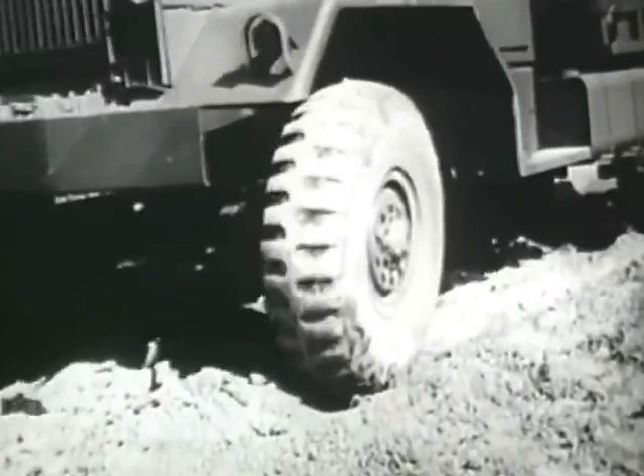Steering a heavy vehicle by manual effort only emphasized the need for a steering assist. This has been accomplished by adding a hydraulic system to the cam and lever steering mechanism. In this film, we will discuss the principles of operation of the hydraulic steering system.

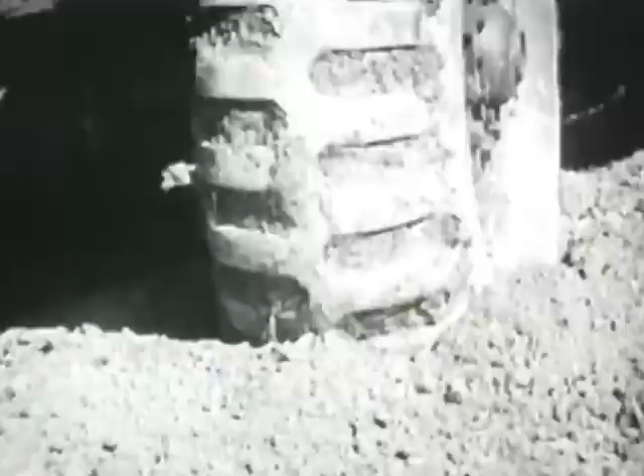This vehicle uses a cam and lever steering mechanism consisting of the following components: a steering shaft and cam, a Pitman arm lever, a Pitman arm shaft and Pitman arm, a drag link, and a tie rod.

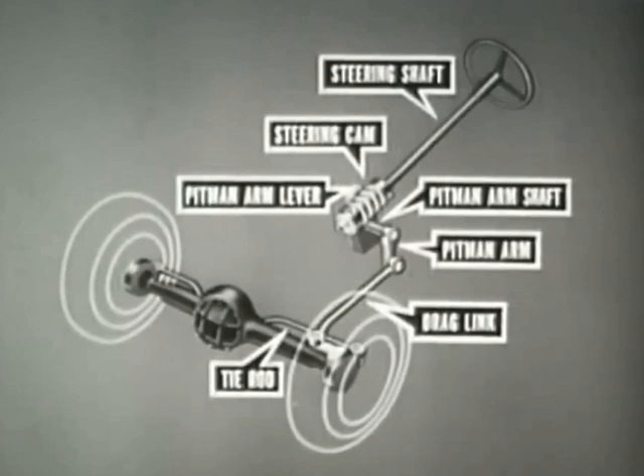To obtain the assist, a hydraulic system has been added to the cam and lever mechanism. The hydraulic steering system is made up of 5 major components: the reservoir, pump, relief valve, control valve, and power cylinder. These components operate on the principle of pressure differential.

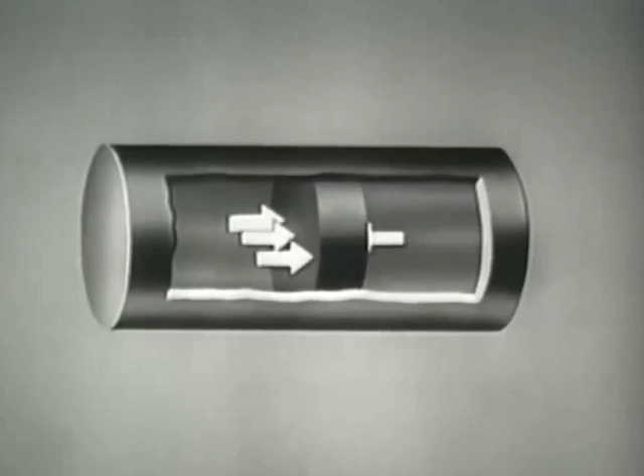Pressure differential is illustrated by this section of pipe. In the pipe is a movable block. The arrows on either side of the block represent equalized pressure. As pressure on one side of the block is increased, a pressure imbalance or differential is created in the pipe, moving the block in the direction of the lower pressure. The moment the pressure on the opposite side of the block is increased to equalize the pushing force, the motion of the block is stopped.

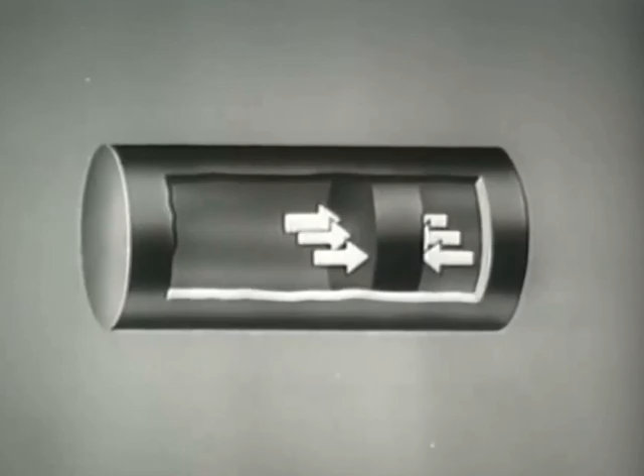In like manner, as the fluid pressure is increased on one side of the piston, it will be moved by pressure differential, aiding in steering the front wheels through the steering linkage.

To aid in illustrating the internal function of the hydraulic system, a schematic diagram will be used. The steering linkage from the Pitman arm lever to the front wheels will not be shown.

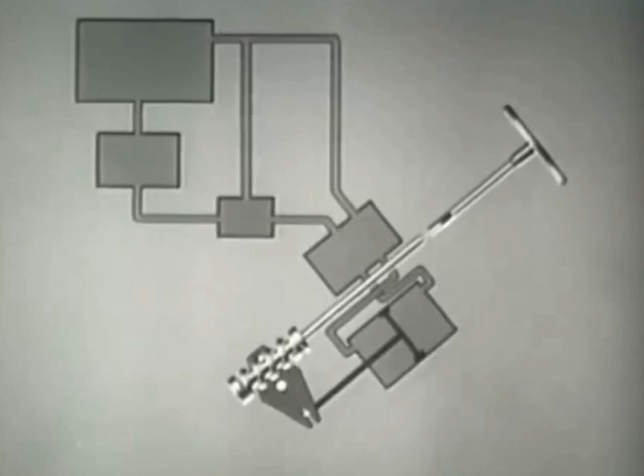Let us view the 5 major components of the hydraulic system as they operate progressively to deliver the steering assist. The reservoir supplies fluid. The pump, driven by the engine, delivers the fluid under pressure to the relief valve and control valve. The control valve, actuated by the steering shaft, directs the fluid to the power cylinder. The power cylinder converts hydraulic pressure into mechanical force by means of a piston.

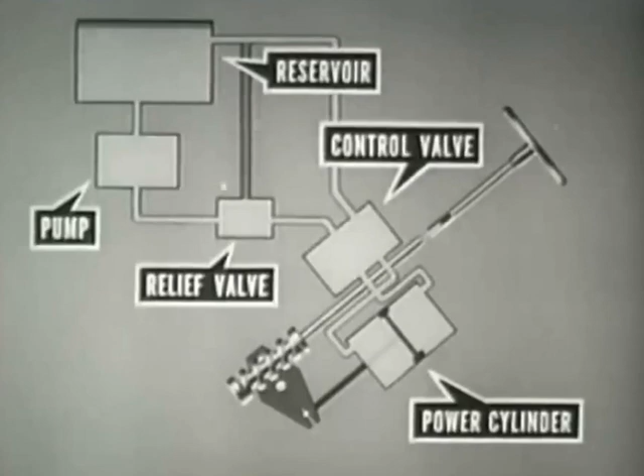The control valve is the heart of the hydraulic steering system. The control valve has a spool which directs and controls the flow of fluid to the power cylinder.

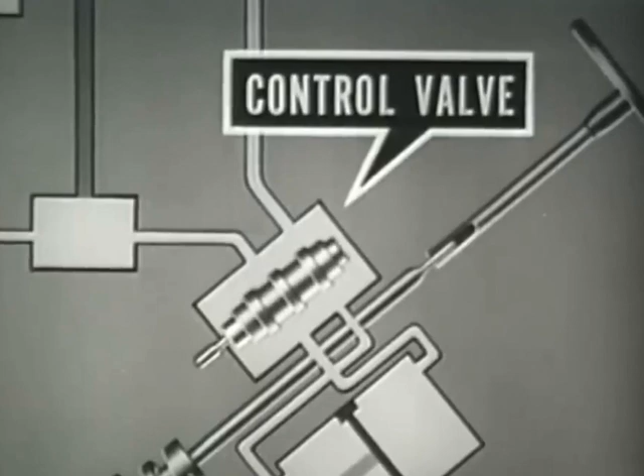With the fluid removed, let us look at the internal construction of the control valve. The spool has lands which control the flow of fluid through the passageways to the power cylinder.

The fluid enters the control valve through the inlet port and flows around the spool in channels leading to the power cylinder. After the cylinder has been filled, all fluid then flows to the reservoir.

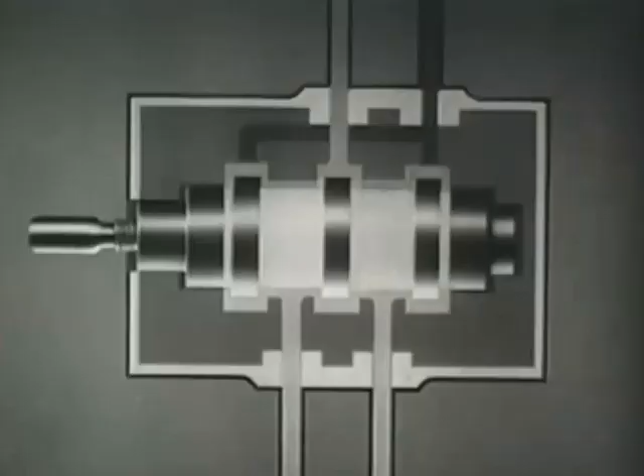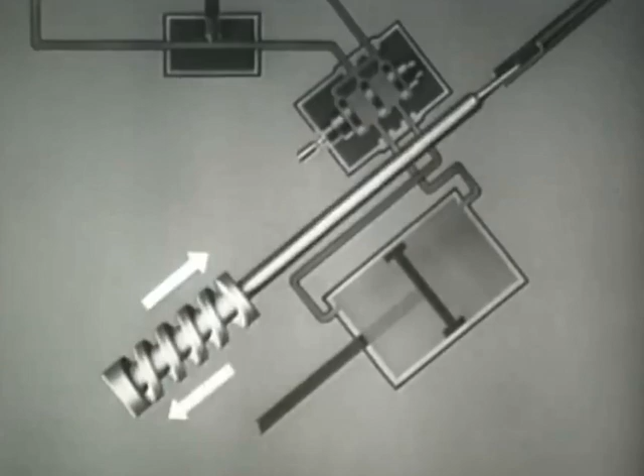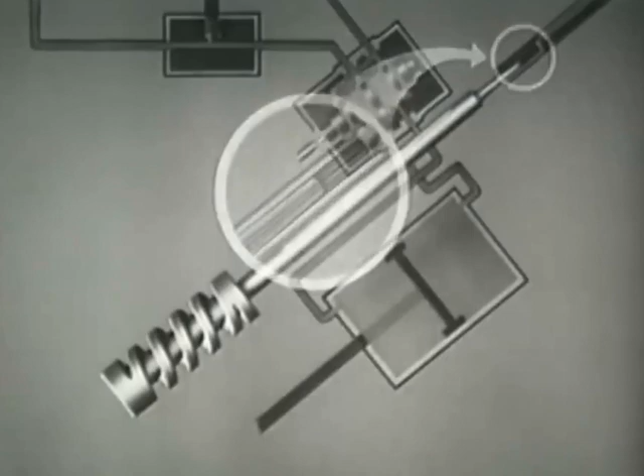In order for the hydraulic steering assist to operate, it is not only necessary for the cam to rotate, but it also must be able to move up and down. A spline connection makes this possible. Were it not for the splines, the steering wheel itself would move up and down.

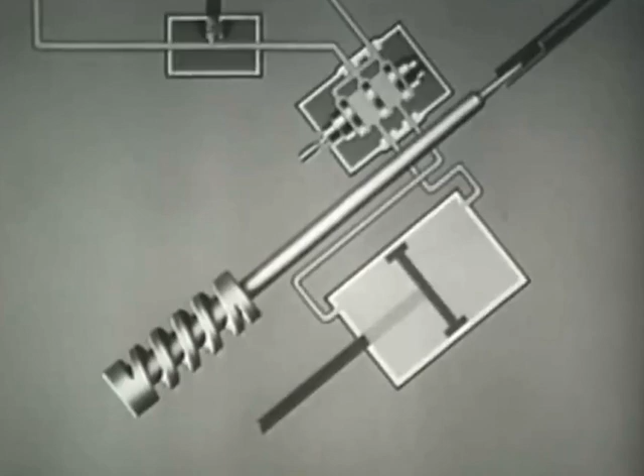The cam is held in center or neutral position by a spring at each end, supported by the steering gear housing. The Pitman arm lever, which actuates the Pitman arm, has one end fastened to the piston rod, the other in mesh with a groove in the steering cam.

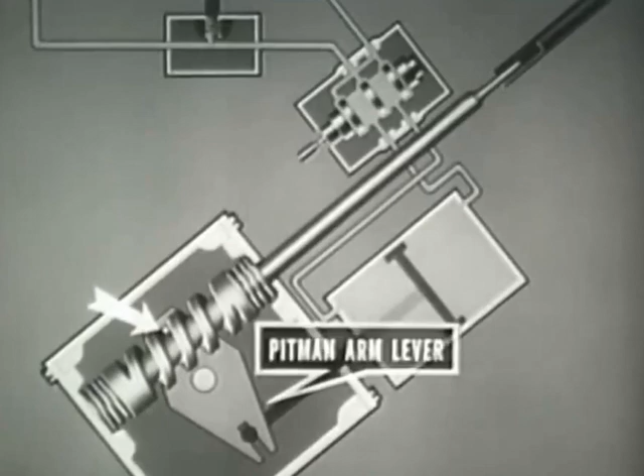When the steering shaft is turned, it requires a greater effort to turn the Pitman arm shaft and lever than to compress the springs at either end of the cam. This is so because the Pitman arm shaft and lever are connected to the front wheels. This action causes a cam spring to be compressed, allowing the cam to move up or down, depending on the direction that the steering wheel is turned.

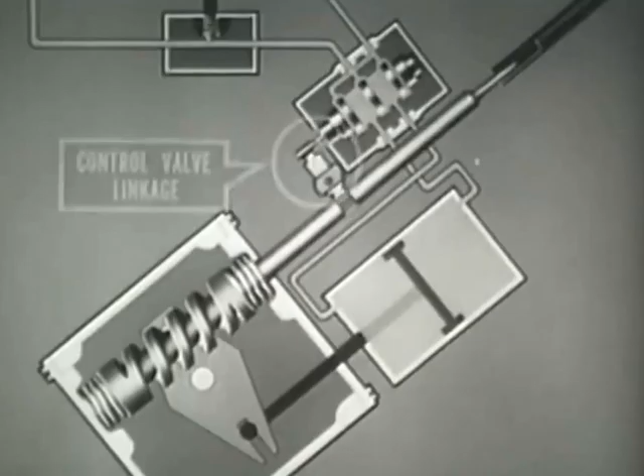This up and down movement of the steering cam actuates the control valve through the valve lever linkage. Full pressure of the hydraulic system is applied with only a few thousandths of an inch of control valve travel. In neutral position, all fluid flowing into the valve from the pump is returned to the reservoir through channels in the upper part of the valve housing, and no steering assist is being delivered.

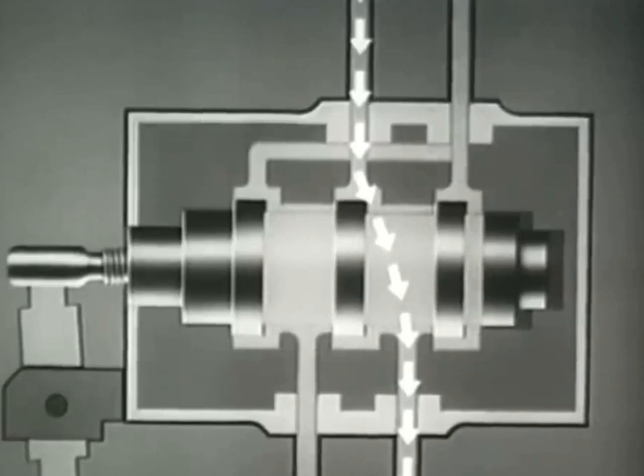As the steering wheel is turned, the up or down movement of the cam actuates the control valve lever, shifting the position of the valve spool. The spool lands corresponding to ports on the valve housing direct the flow of fluid from the pump to the power cylinder.

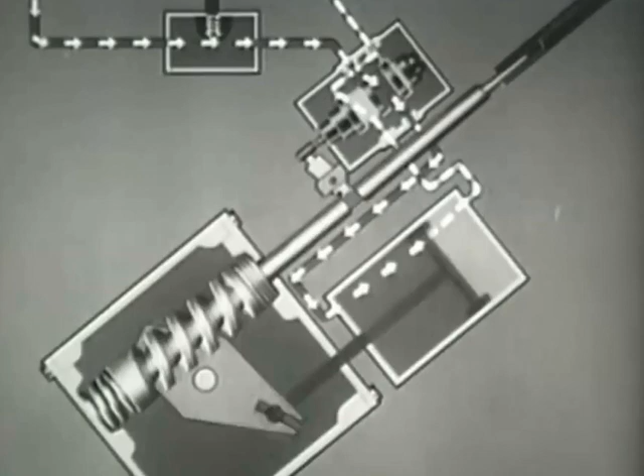This flow of fluid causes an immediate pressure increase on one side of the piston in the power cylinder. At the same time, fluid from the other side of the piston is displaced by pressure differential and forced up and around the unrestricted passageway in the control valve to the outlet port leading back to the reservoir. The pressure differential in the power cylinder moves the piston and piston rod, thus applying a mechanical force to the Pitman arm shaft lever, turning the wheels in the desired direction.

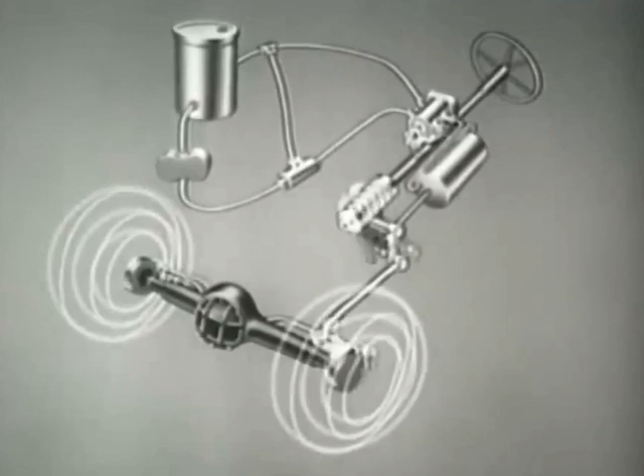When the piston reaches the end of travel in the power cylinder, the pump continues to deliver fluid, causing an increase in operating pressure. The relief valve provides an escape for this excess pressure back to the reservoir.

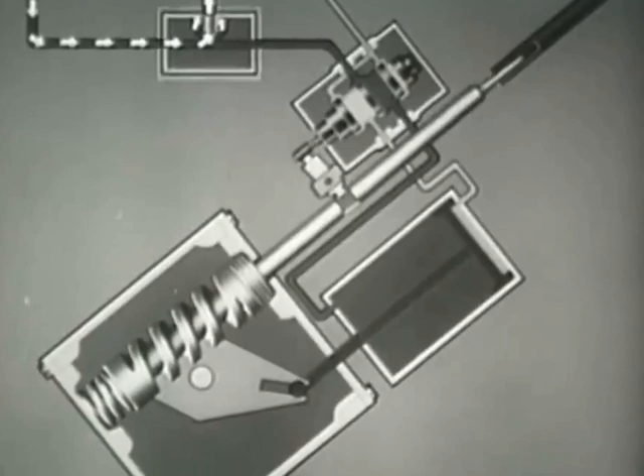After completing a turn, the driver releases tension on the steering wheel, and the steering system is returned to straight-ahead position by the steering geometry of the front wheels, allowing the hydraulic system to return to the neutral position.

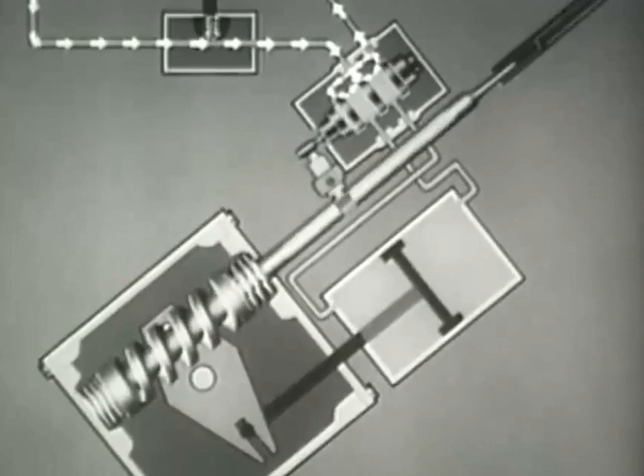To steer in the opposite direction, the cam actuates the control valve lever the other way, and pressure is now directed to the opposite side of the power cylinder piston.

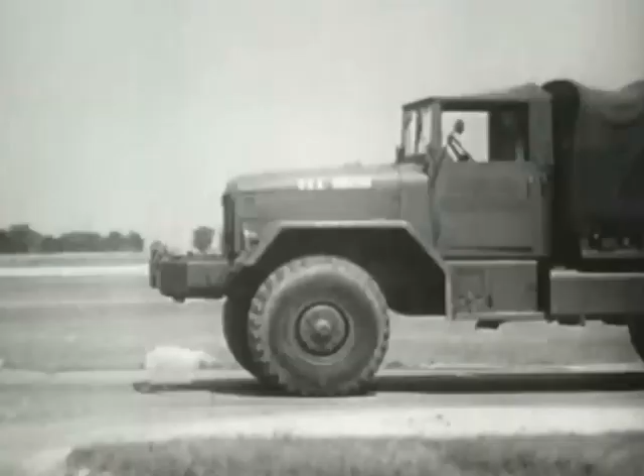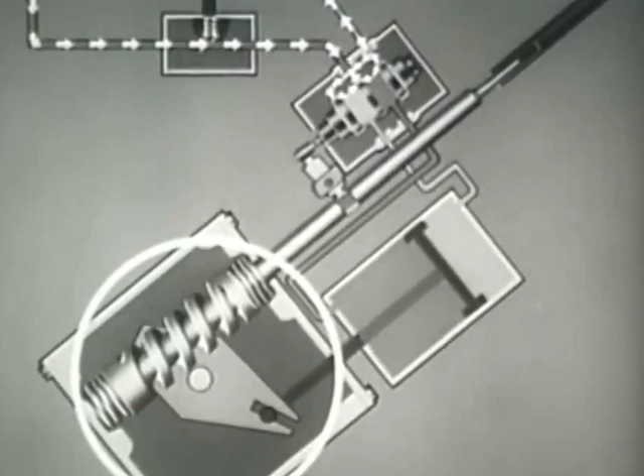When the front wheels are held in a constant turn, the cam will not be rotated. The Pitman arm shaft lever is held stationary toward one end of the steering cam by the increased pressure on one side of the piston.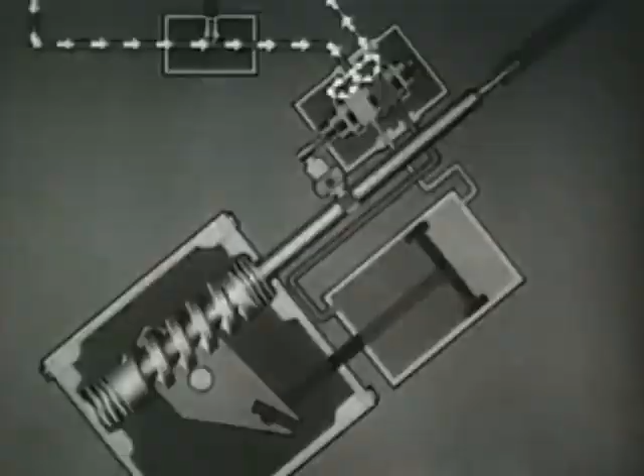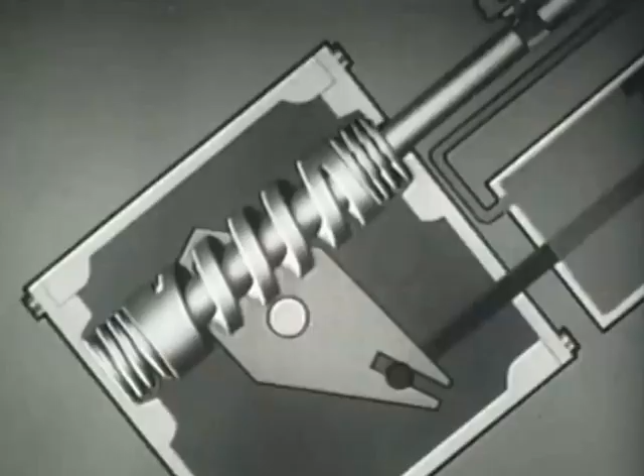The tendency of the steering geometry to return the wheels to the straight-ahead position is overcome by the driver, who maintains a constant force on the steering wheel in the direction of the turn. These two opposing forces cause the steering cam to partially compress the upper cam spring.

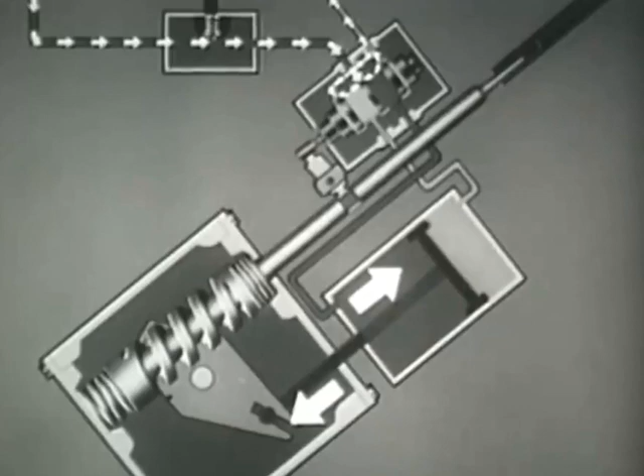This also moves the control valve linkage and positions the valve spool where fluid pressure will equalize the force exerted by the steering geometry acting on the piston rod. The front wheels can then be held in any desired degree of turn.

On return to neutral, all fluid from the pump is directed back to the reservoir. The pressure is lowered throughout the hydraulic system, and the piston and piston rod do not function.

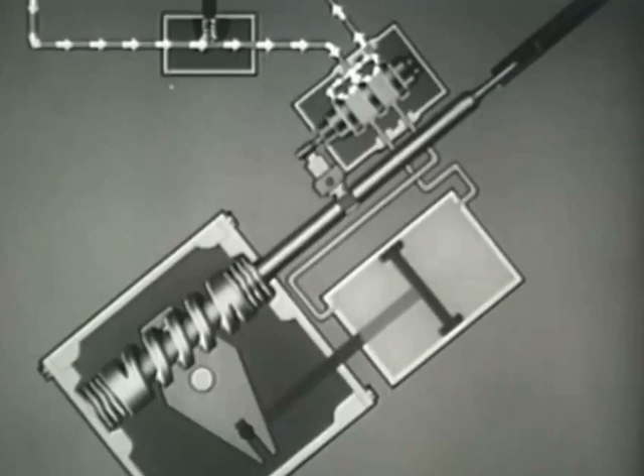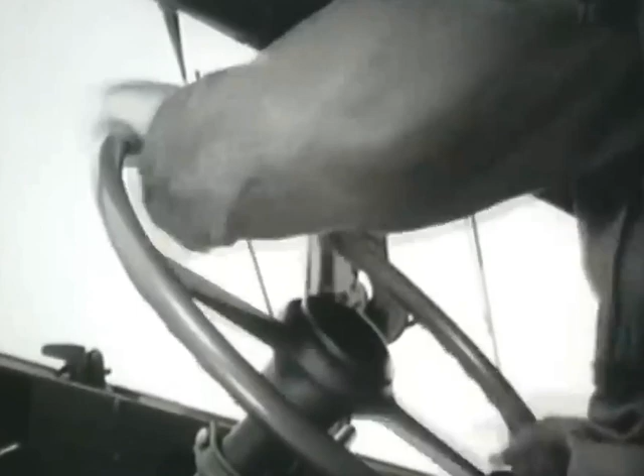One of the steering problems of the heavy vehicle with cam and lever steering is road shock. Road shock causes kickback of the steering wheel and makes control of the vehicle difficult.

On the other hand, heavy military vehicles equipped with hydraulic steering resist road shock through a reverse action in the power cylinder.

When one of the front wheels is subjected to road shock, the shock is transmitted through the steering linkage to the Pitman arm and the Pitman arm shaft lever. The Pitman arm lever then actuates the cam, causing it to move up or down depending on which wheel receives the shock.

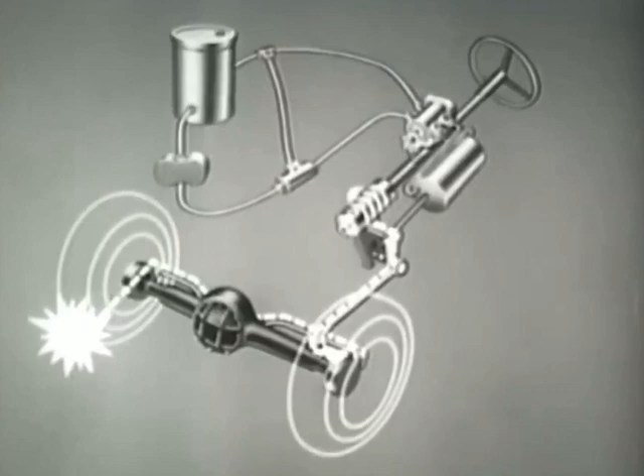The movement of the cam actuates a control valve, which in turn directs increased pressure to one side of the piston. This increased pressure will be equal to the shock received by the front wheel, causing the front wheels to remain in a straight-ahead position.

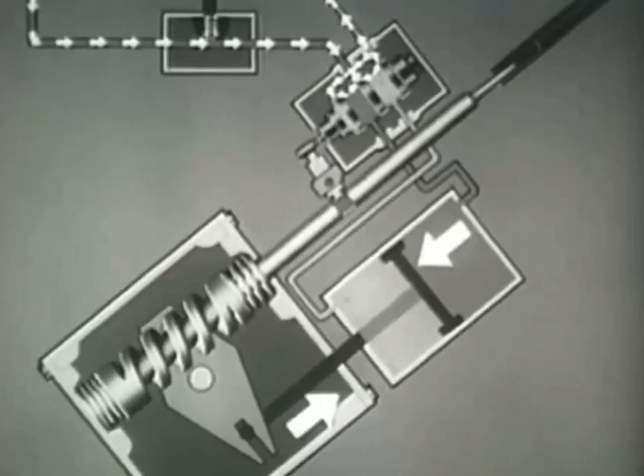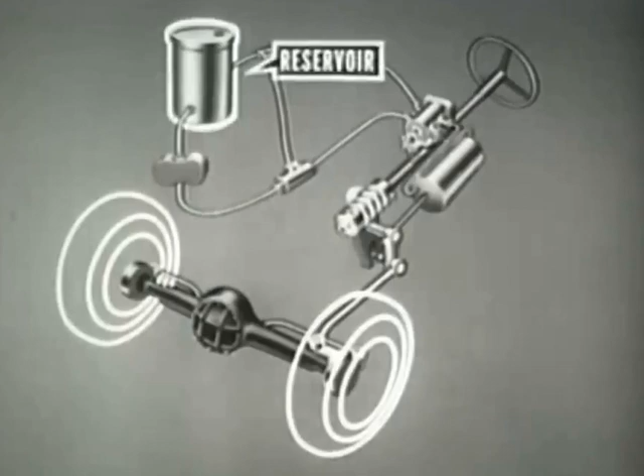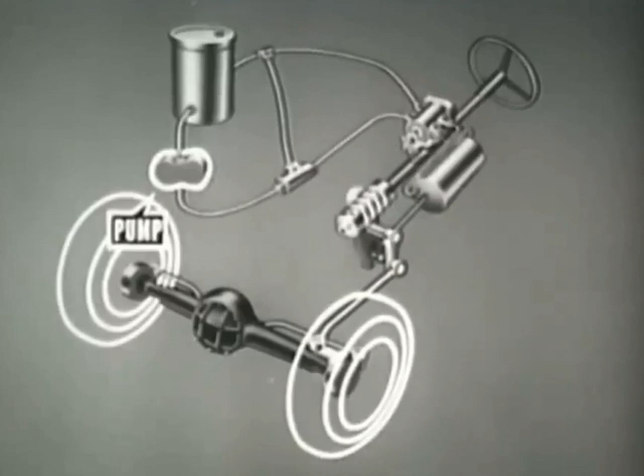Now let us review the operation of the hydraulic steering system. The reservoir supplies fluid. The pump, driven by the engine, delivers the fluid under pressure through the relief valve to the control valve. The relief valve provides an escape for excess pressure back to the reservoir.

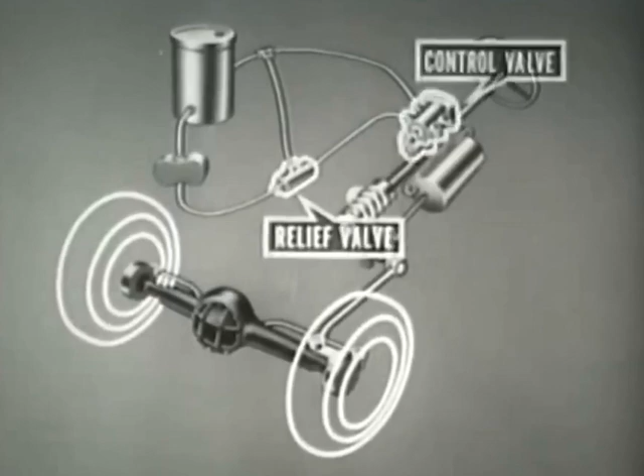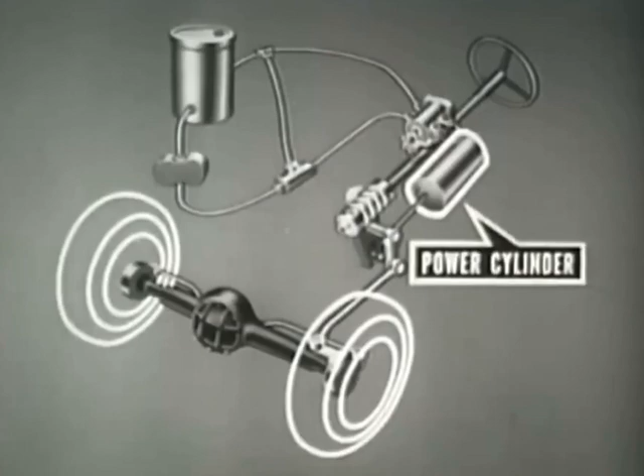The control valve directs fluid to the power cylinder. The power cylinder converts hydraulic pressure into mechanical force, which in turn actuates the Pitman arm shaft and lever and the Pitman arm, turning the front wheels of the vehicle through the steering linkage.

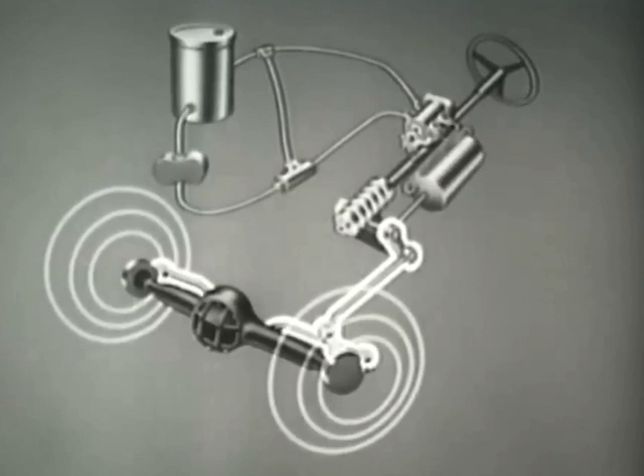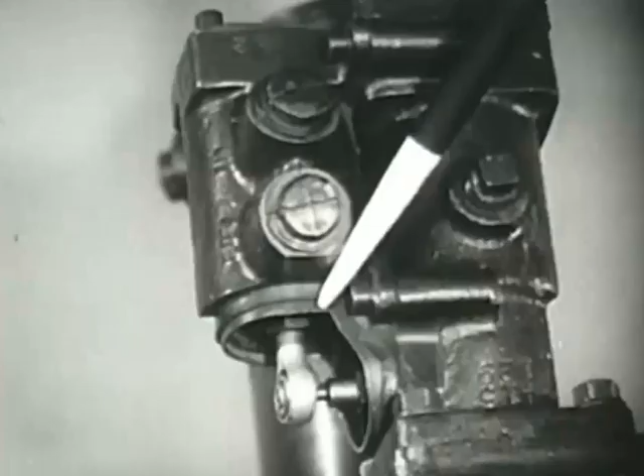In order for the hydraulic assist mechanism to operate, the steering cam must be able to move up or down to actuate the control valve. A spline connection makes this possible. The cam is held in center or neutral position by a spring at either end.

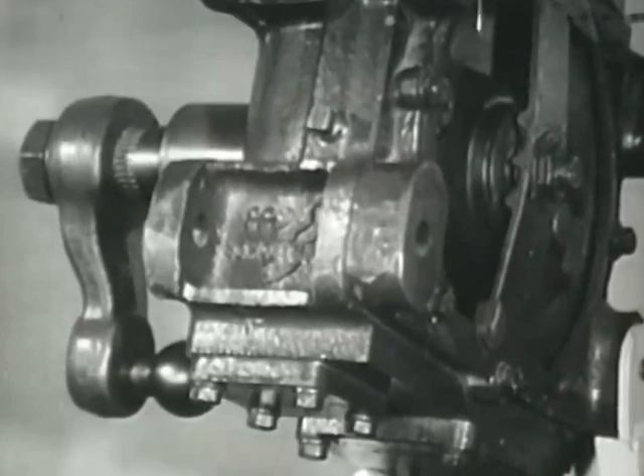The slightest movement of the cam results in a pressure differential in the power cylinder and an applied force on the Pitman arm shaft and lever and the Pitman arm. The hydraulic steering system resists shock and kickback through a reverse action in the power cylinder.

With military vehicles getting larger and heavier to meet the demands of modern warfare, the hydraulic system is becoming increasingly important as a power assist in steering the vehicles.